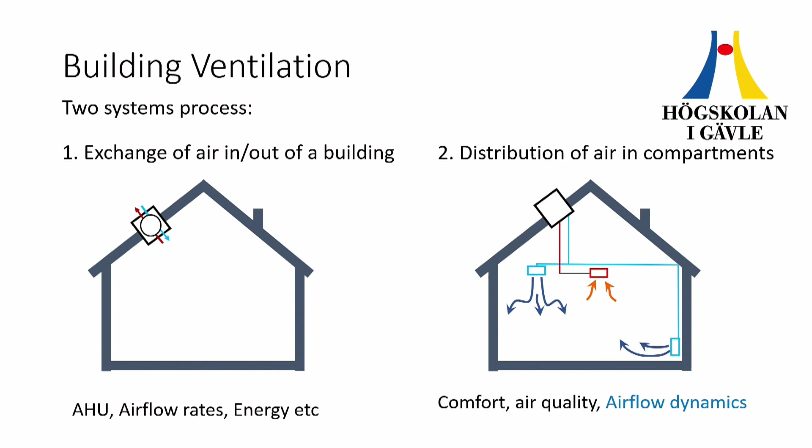Much of the attention now is dedicated to the first process, where we look at energy efficiency, air flow rates, and the air handling unit. But very little attention is given to distribution methods, except for understanding whether this is a displacement ventilation system or a mixing ventilation system. More importantly, we are not paying attention to the airflow dynamics happening in the building. These two processes: the first is independent, but the second process is dependent on the first.

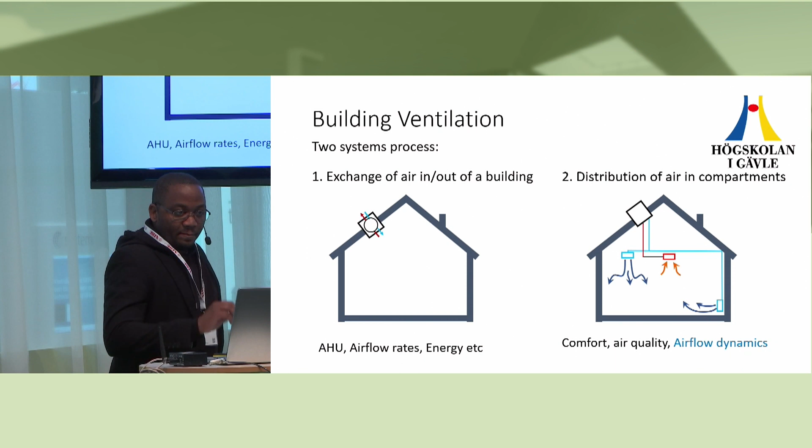I think we had a rude awakening to the pitfalls of ventilation systems in residential buildings, and this was highlighted during the corona pandemic. Most of you would remember that a lot of people got infected with the virus basically in their own homes.

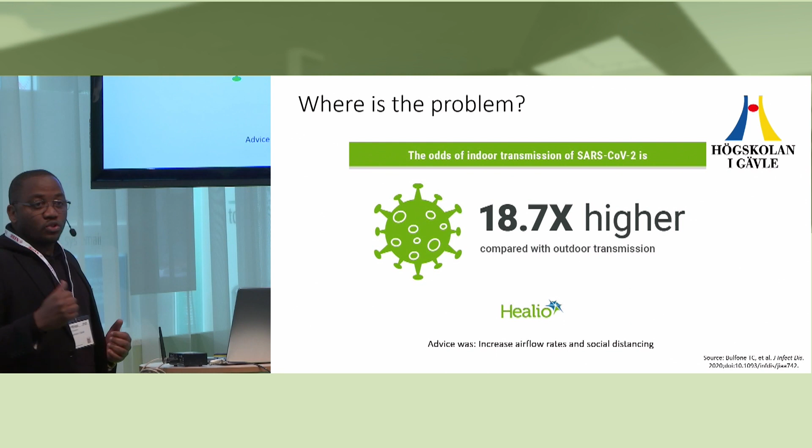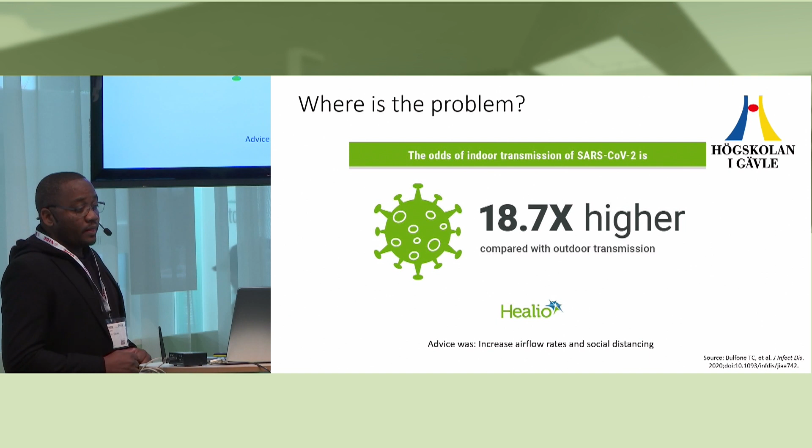This is because when you have a family member who is infected, the recommendation was to self-isolate, maintain social distance, and always clean your hands, don't touch your face. The recommendation then was given that you need to increase airflow rates and keep social distancing. But that wasn't enough, because a lot of people got infected in residential buildings.

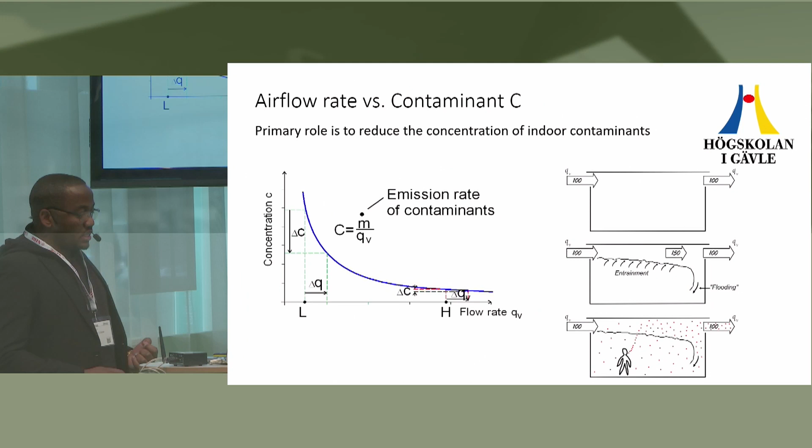So what is it that was missed, and what is the relationship between airflow rate and contaminant concentration in the building? This curve illustrates the concentration of contaminants in the building against the airflow rates. As you can see, with low airflow rates, the concentration is high; with high flow rates, the concentration is low.

This relationship is interesting because when you make any small changes within this region, the concentration drops drastically. But if you increase the flow rates, at higher flow rates any change you make results in very small change in concentration. This shows there is a limit on how much flow rate will influence conditions in the room. Secondly, there is also the aspect of energy.

So you increase the flow rates, but it doesn't help so much with the concentration of contaminants. Another aspect we overlook is that you've got the ventilation flow rates and your balance system, but we are not accounting for the internal flow inside the building. That internal flow causes entrainment, and that entrainment introduces what we call contaminant flooding.

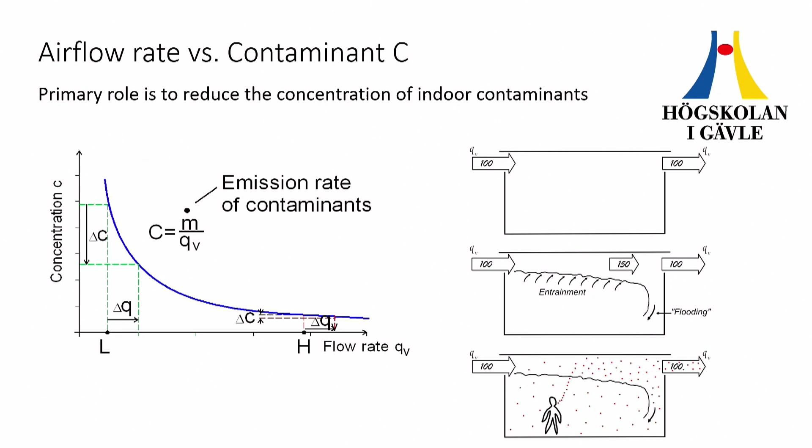So the system will start flooding. If you have a person who is infected, the ventilation system itself becomes a transportation mechanism to spread the contaminants to other regions of the room.

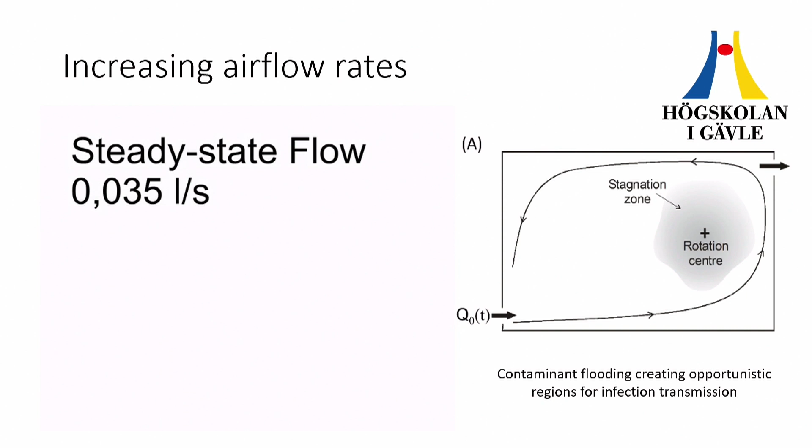Here's another aspect: since the recommendation was to increase the airflow rates, let's look at what happens when airflow rates are increased. When you increase the airflow rates, you see that stagnation regions are introduced.

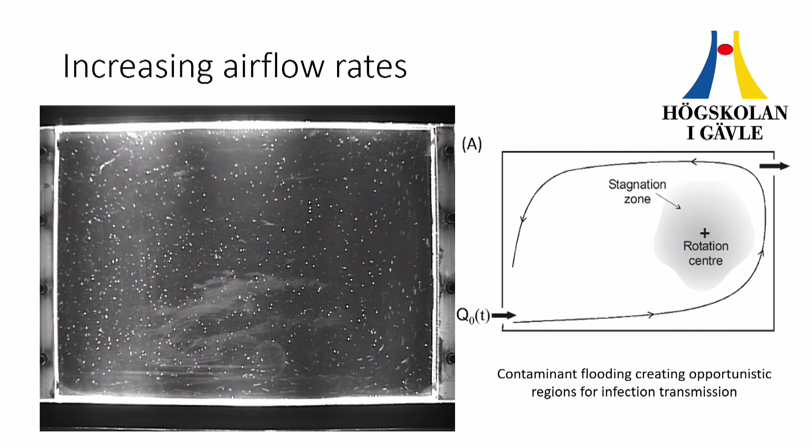Those stagnation regions actually become opportunistic spaces for infection. If you happen to be in a stagnation region, that's where all the contaminants are flooding, and there is a high likelihood you will get infected because there is poor ventilation in that region. So increasing airflow rates is not a solution. We have to understand the airflow dynamics happening in the building, and those dynamics are not accounted for when designing residential buildings.

So this is just to give an illustration of how we are designing residential buildings.

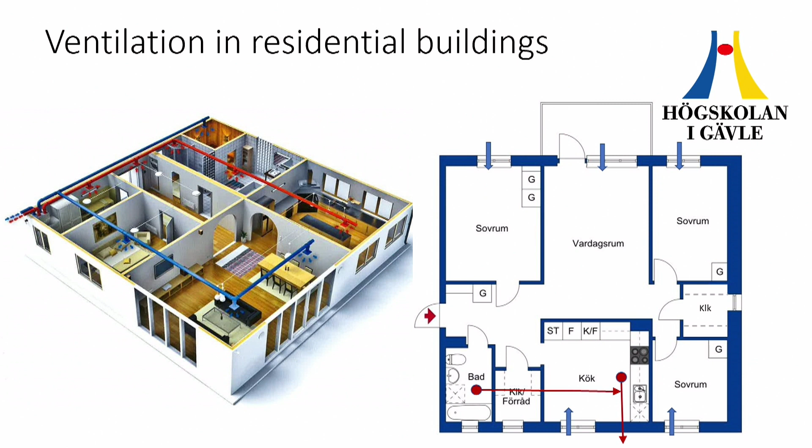So you see, you have supply airflow rates dedicated to each room, but the exhaust is only put in the kitchen and in the bathroom. This is for a balanced ventilation system. In other cases, you only have the so-called F system, where supply is dedicated maybe through windows, where you have infiltration coming in, but still the exhaust is placed in the bathroom and also in the kitchen. So if we had one person who is infected, located in one room, where do you think the airflow goes? We are not accounting for these airflow dynamics in those rooms.

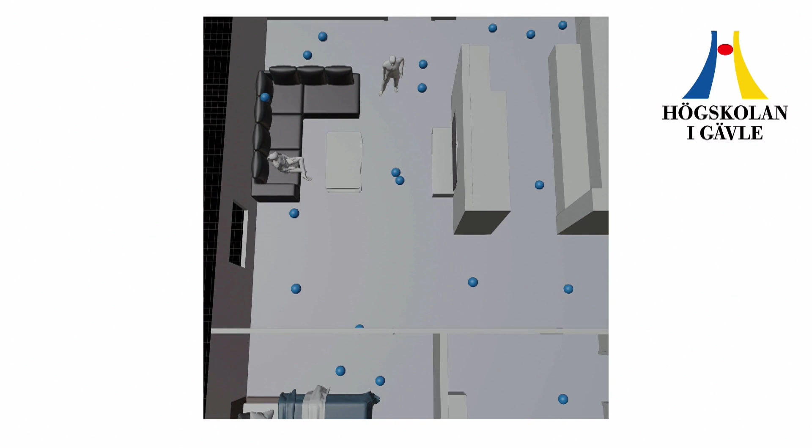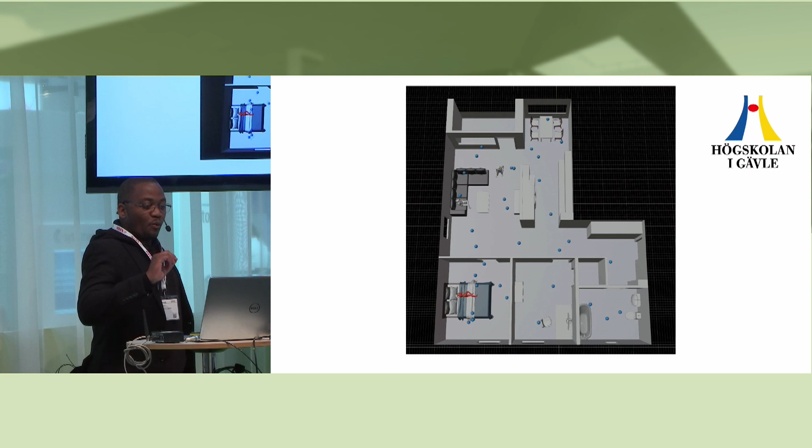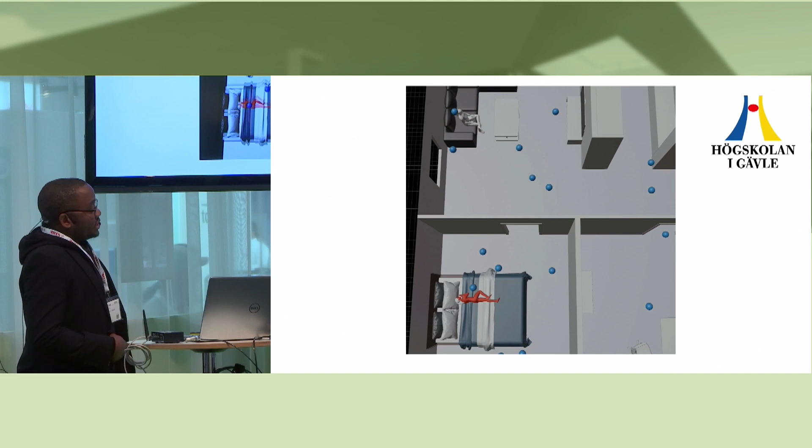I have an illustration, hopefully you can follow through, of what happens, because the airflow dynamics in the room, we can't control them. They are controlled by changes in temperature. So if you have an infected person in the room, the air will come out and mix with other points or regions in the room before it is eventually taken out in the bathroom or in the kitchen. If you can pick one representation of air and just follow it, you see it circulate in the room, go to other regions, circulate there too, and eventually go to the kitchen where it will be taken out.

So, at the University of Gävle, we've got a project dedicated to residential buildings. This project is ventilation as a strategy to reduce indoor transmission of airborne diseases. We are developing a new model, a new risk assessment model, and new strategies. The participants are myself, Professor Mats Sandberg, and the research engineers Elizabeth, Mikhail, Dario, and Leif. I deliberately came with Elizabeth because she's the one developing methods for the new strategies we have, so I think she's the best person to talk about them.

When we are looking at ventilation strategies, sadly, people think this is a COVID project, but it's not. It's a project that focuses on indoor air quality with consideration for reducing transmission of infections. This includes seasonal flu, it could be COVID, all these are accounted for.

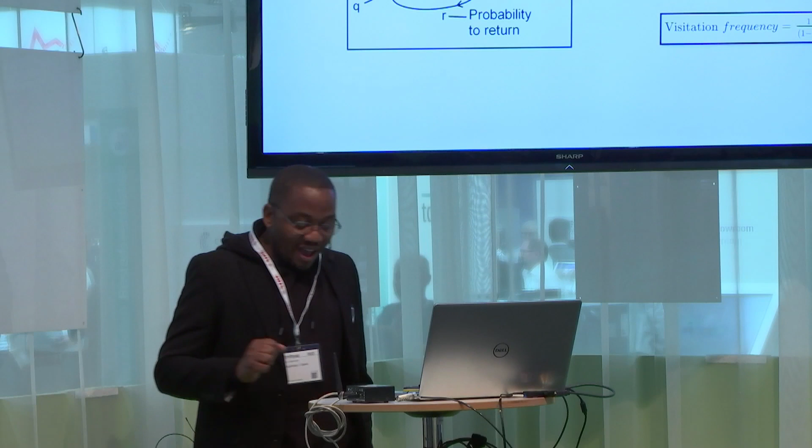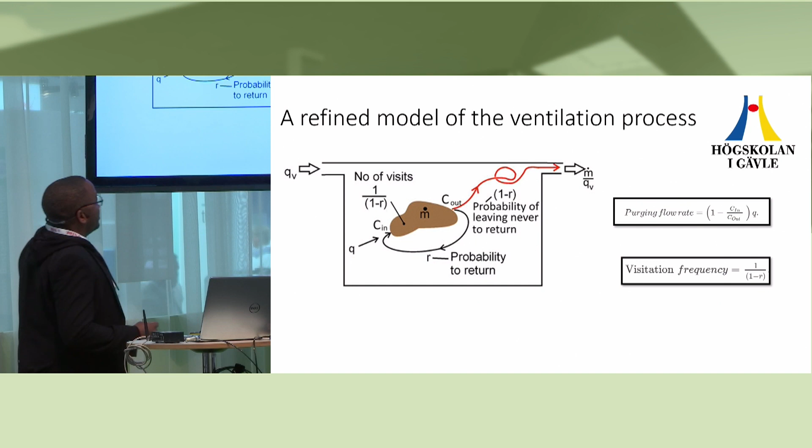So we have a new refined model where we are looking at two concepts that we've introduced, called the purging flow rate and also the visitation frequency. The concept is that at a location, the contaminants in that room will recirculate and come back to the same point before it is taken out of the room. So the recirculation is governed by the probability to return. The probability to return is what we call the visitation frequency. The higher the visits that point, the air molecules make to a point, the higher the likelihood of contamination and spread of the infection.

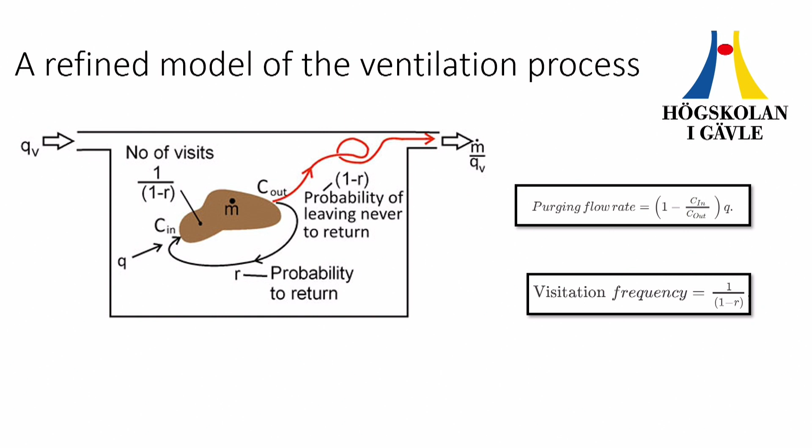And then we've got the purging flow rate, which is the flow rate that is taking away the contaminants and leaving the region or room for never returning. With these two concepts, we have seen that the ventilation system is reducing the concentration of contaminant agents, but at the same time it is also spreading the contaminants. So your ventilation system is helping you not get infected, but it's also exposing you to the infectious agents.

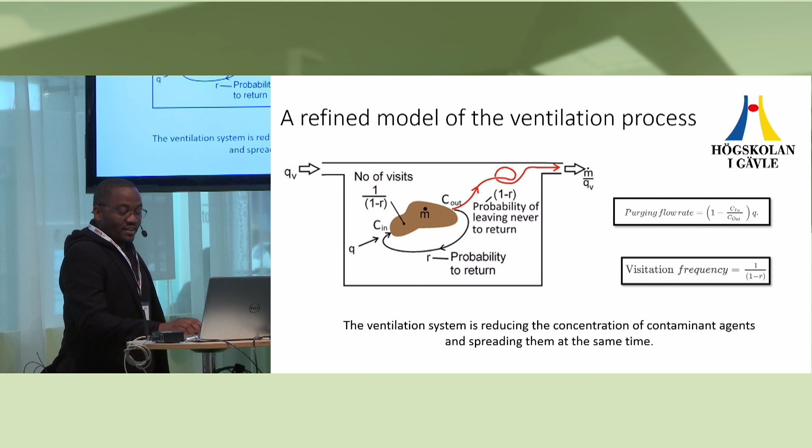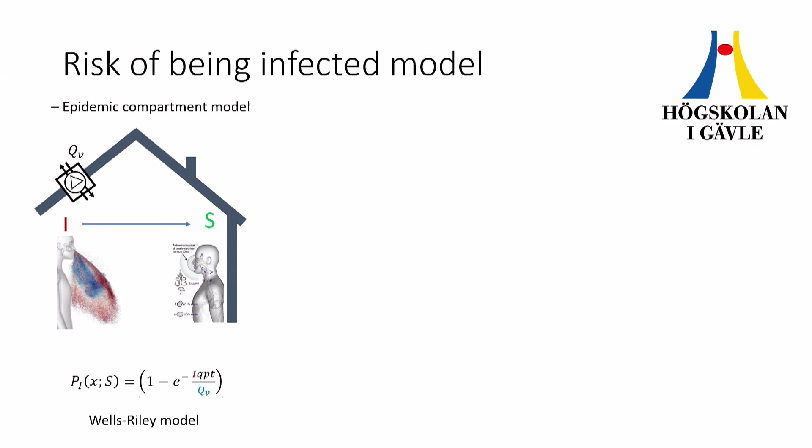Currently there is the risk assessment model, where you have an infected person in a building, and then a person who's susceptible to the infection. This is governed by the Wells-Riley model, which centers on the ventilation flow rate that you set for the building. But we have introduced a new concept where, within the region, there is a transfer probability from within the same room, from the person who is infected to the person who is susceptible to the infection.

That is governed by the visitation frequency. And then we also have the transfer probability between rooms, and that is governed by the purging flow rate. With these two concepts, we are proposing a new transmission risk infection model, governed by both the transfer probability and the purging flow rate. This means that each ventilation system you have, if it's a mixing ventilation system, will have its own transfer probability and purging flow rate. If it's a displacement ventilation system, it will also have its own transfer probability and purging flow rate. With this concept, we are testing to see how we can reduce the risk of getting infected, and for that we had to develop new methods. I'll leave it up to my colleague Elizabeth to take it up.